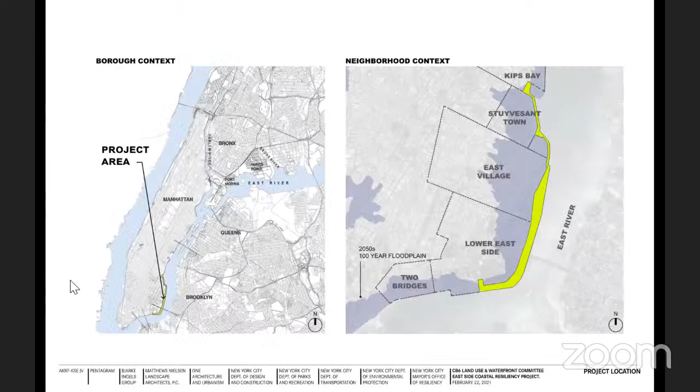I'll just give a really quick intro, and I'll let my colleagues from AKRF and Pentagram team walk us through very quickly on our design update here. So last month, where we left off, we presented wayfinding, sort of resiliency, interpretive resiliency design for the signage in the park, including this project. We had some couple of good comments and feedback from this group, from the community members and Community Board 6 folks here. That was very helpful.

We had the same presentation and feedback from Community Board 3, so we combined all the feedback and tried to incorporate as much as we could. We went back to our partner agencies, Parks and DOT. A number of those requests or questions we weren't able to incorporate, but a shortlist that we were able to address is included in this design.

What we were able to incorporate was feedback about the size and legibility of the sign, so we enlarged the actual sign and the font. We also worked on the background color so it's a little more legible, and worked on the language that was a little too technical and less educational, which was not our intent, so we added more accessible language.

With that, Johari, Rory, I'll hand it off to you folks to walk us through, and then we can take questions after that. Great, so Rory, I'll hand it off to you so you can walk through what we've updated.

So this first sign, the resiliency introduction sign — the major change from the last community board presentation we gave is first the background color of the sign. It's gone from white text on a dark background to dark text on a lighter background, and we've also added a secondary tone.

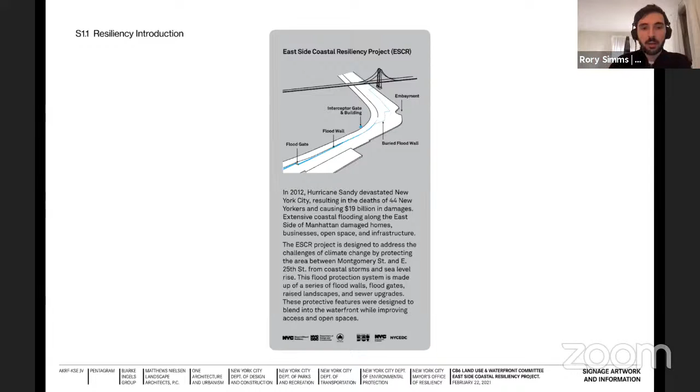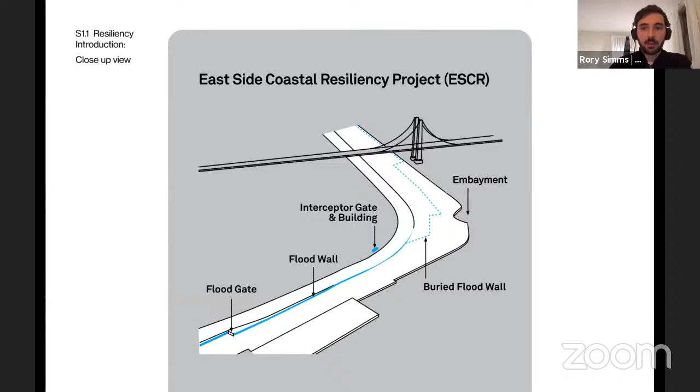So gray for the background and then white introduced into the graphics to help them pop out a bit more. We've also increased the size of the labels on the diagrams, the font size for legibility, as well as the font size of the body text and the title. The line weight of the diagrams has also been increased.

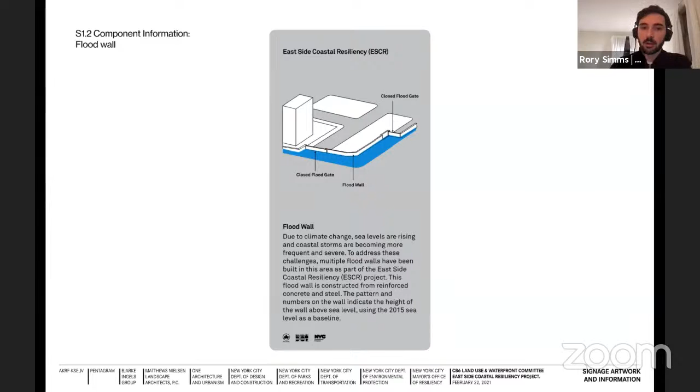For the component signs, we increased the height from 18 inches to 24 inches, so that they're consistent with the introductory sign. This also leaves more space for the increased font size and some more breathing room for the diagrams, so the sign isn't completely covered with diagram and text, making it a little more approachable.

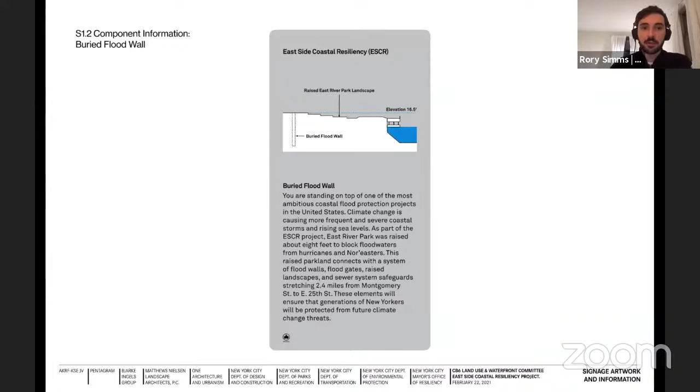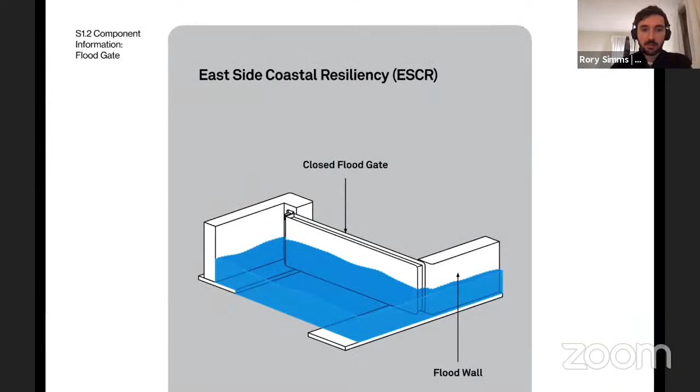Those same adjustments apply to the next three signs, all of the component information signs. And the higher contrast of the diagrams and their colors is supposed to help increase their impact and make them as legible as possible.

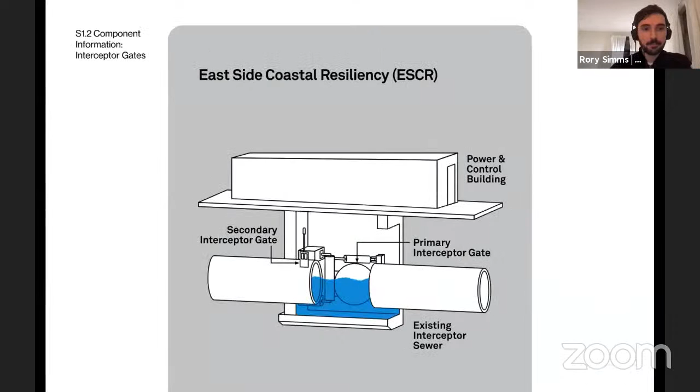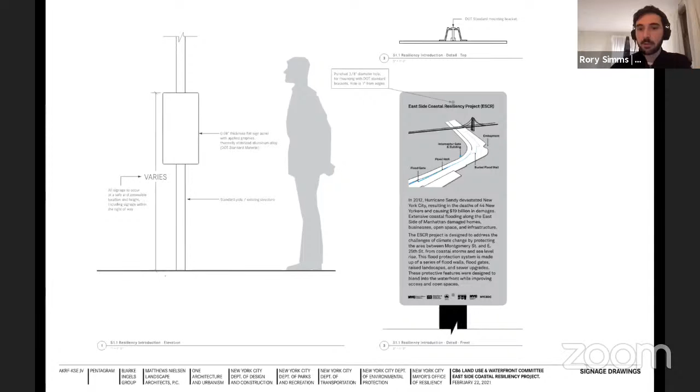The construction of the sign is more or less the same as it was, just the overall dimensions have increased.

One thing we are looking for today is a resolution so that we can proceed with PDC submission. But other than that, if there are any questions or slides you'd like us to circle back to, we can walk through them during the question period.

Okay, Anne, I see your hand up.

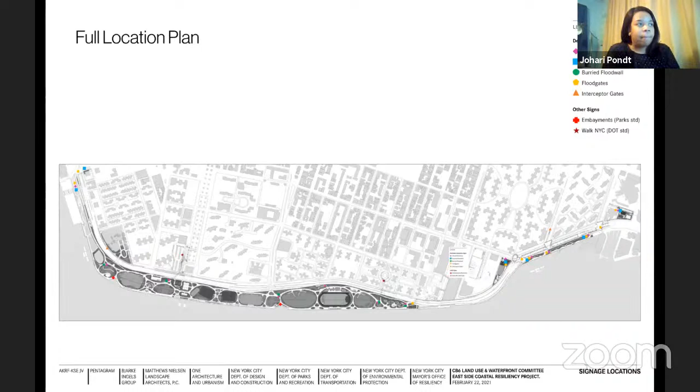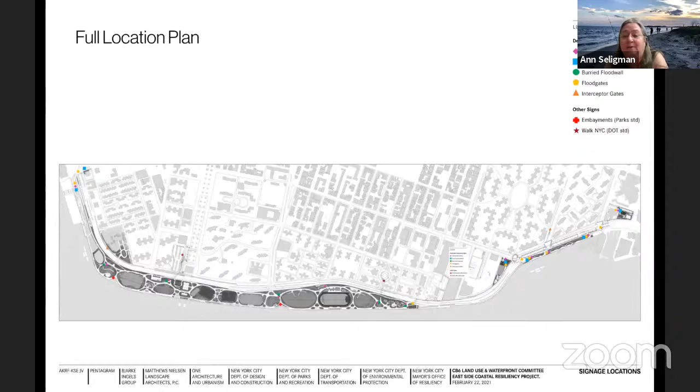Just really quickly, looking at the difference between what we asked for and what you did — one obvious mismatch is anything about either a QR code or availability in other languages, which could of course probably be achieved through a QR code. I understand there are space issues in terms of providing languages, which is why it would be great if you could have a QR code or something that says for additional information, go to the website. It does not take up more room than all those agency icons. So I'd just like to throw that out there.

Thank you. Yeah, I can speak to that. Hi Ann, this is Q from DDC. That was definitely one of our goals. However, when we really sat down and talked through it — and one thing for everybody to remember — we have to make sure that this is something that can live on beyond the life of this project timeframe. A lot of these things have to be coordinated with multiple different units at various agencies.

It's important to make sure we're delivering something we can hand off to the agencies, to their maintenance and operations units, that it's within their capabilities. So the QR code was one of the ideas we had based on the request to provide translated signs. The sign itself doesn't have enough space for multiple languages, and adding additional signs on that pole isn't possible either, because of visual clutter and vandalism or potential issues in the right of way. But the QR code came up as a creative way around that, to connect to the project website that provides that translation option.

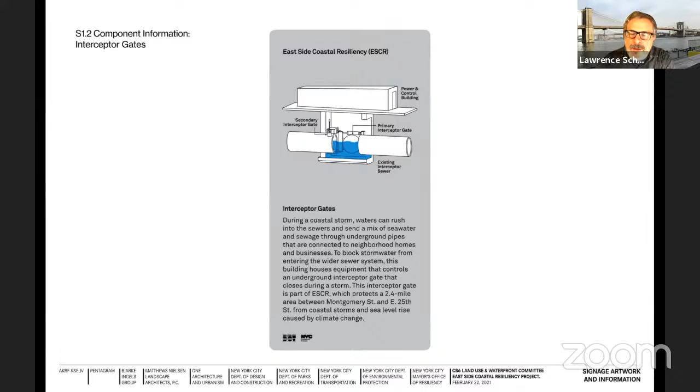Well, as long as you incorporate both, I'm on board—and also make the recommendation about having a cornerstone or the date of construction. Yeah, and the date thing—I just saw that in the comment box too.

These signs will not go up until construction is finished, until the project is done. So these are not construction signs—these are added interpretive signage for the flood protection itself. Once the project is done, the agencies overseeing that particular area, most likely Parks or DOT, their units would install these signs after we're done with the project. So we're just tasked with designing them right now and handing off the specifications.

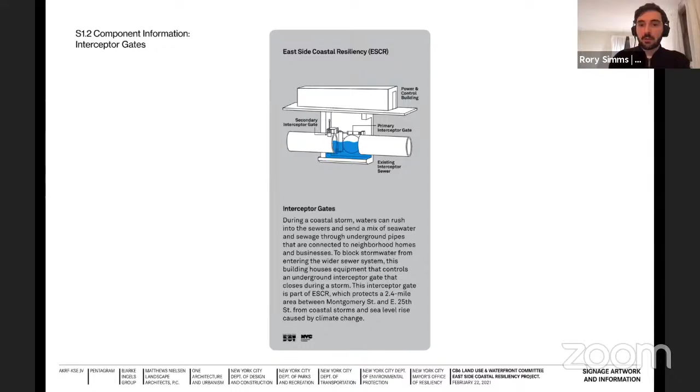Thank you. All right, thank you all. So the ESCR team is looking for a resolution before their presentation before the Public Design Commission. Does anyone want to make a motion?

All right, Sandy. I make a motion that we support this proposal for signage. Excellent. Is there a second? Second. All right, Letty, thank you very much. Cody, do you want to take a vote? Yes, I will, committee members. I will call your name and please declare in favor.

I'm sorry, can we just confirm that the resolution will include the concerns that had been raised during this meeting?

Yep, Sandy, please. I think the resolution needs to include our concern that we have access for additional languages through whatever means possible, and that we should just add that into our resolution as it's written. That we look for some other method for including alternate ways to access other languages.

Yeah, and that might include Braille and other accessibility issues. I don't know, but I just think we need to address it, that we want it to be more accessible. So if we add that into our resolution, we would still move forward with the resolution, but add that as one of our resolves.

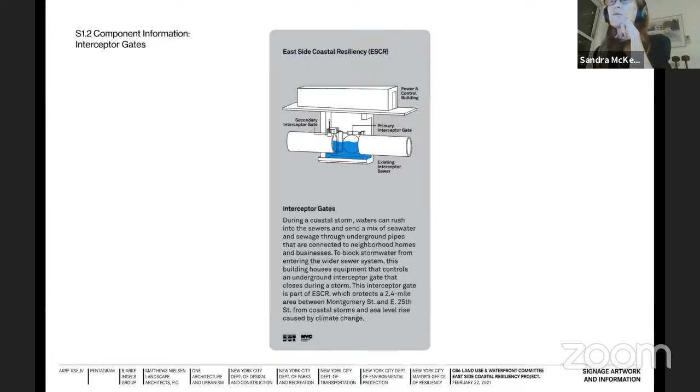Okay, I don't see a problem with that. All right, do we need to second or re-vote, or do we just go straight to the vote? There was a second on the floor, so if you want to just proceed, that's fine. Okay, I'm fine to proceed.

All right. Jim Collins. Is Jim joined? Adam Hartke. Aye. Molly Hollister. I don't think Molly's joined. Kavitha Matthew. Yes, aye.

Sandy McKee, in support. Wells Magali, in support. Gene Santoro, aye. Larry Shire, aye. Ann Seligman, aye. Lou Sapersky. Sandro Sherrod, yay. Letty Simon, aye. Kathy Thompson, aye. All right, that's 10 in favor, no opposed, no abstentions, and none not entitled.

Excellent, thank you. Well, if Lou was here, he would have said 'yo,' so that would have completed the whole circle. So anyway, do we have any volunteers to write the resolution?

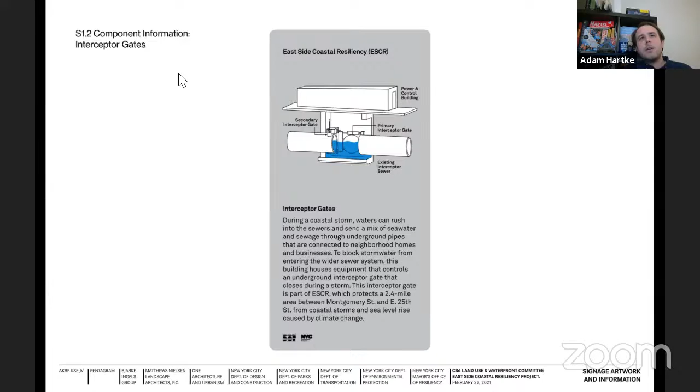All right, Desiree, I believe the floor is yours. Thank you, everyone. Thanks for having us, Adam. Thank you, Q. Thank you. Thank you. All right.

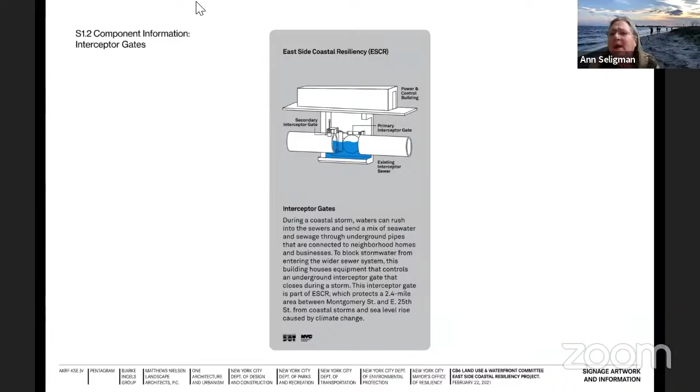Adam, I'll write it. I won't promise to get it done by next Monday, but I'll write it. Oh, okay, sounds good. Thanks, Ann.

Thanks, Adam. I'm going to share my screen now. Great, thank you. All right, great. You can see that? Yes. Great, all right, perfect.

Good evening, everyone. Thank you again for joining the ESCR portion of the CB6 Land Use Committee. Again, my name is Desiree Gazzo, HNTB LiRo, the PMCM consultant for DDC for the East Side Coastal Resiliency Project. So a few slides we have for you tonight. It's a shorter presentation, but we did want to provide an update on the upcoming construction work and a couple of other small updates. So really quickly, we'll go through the pre-construction and construction phase updates, move on to a few construction advisories which we've released recently, and then jump into a couple of points on the what we've heard slide.

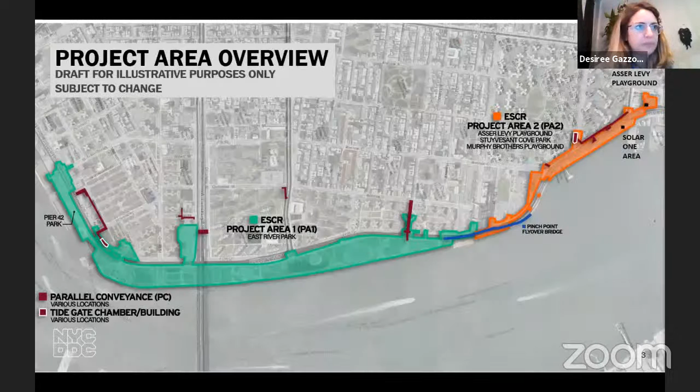So again, we have our project areas, which we show every month, and then the overview of contracts. For project area 1, as many of you already know, we had our bid opening on the 8th of February, so now those bids are under review. I know we received one or two questions in the inquiry tool regarding the bids.

There's not much to say, except right now they're under review, and we'll be able to provide more information as that review continues and once we get a clearer idea of who the lowest bidder is. So there will be a marginal impact to the overall timeline, which Jeff Markleese from DDC has spoken about last time we were here, and East River Park will remain open through spring 2021.

For project area 2, as you can see, we are in construction on what we call phase 1 of the project, which is the Asser Levy Playground and Stuy Cove Park around the Solar One area. We'll have clearer maps in the next update. Parallel conveyance will be released for bid in the upcoming weeks with the bid opening in early 2021. So those are the updates on those contracts.

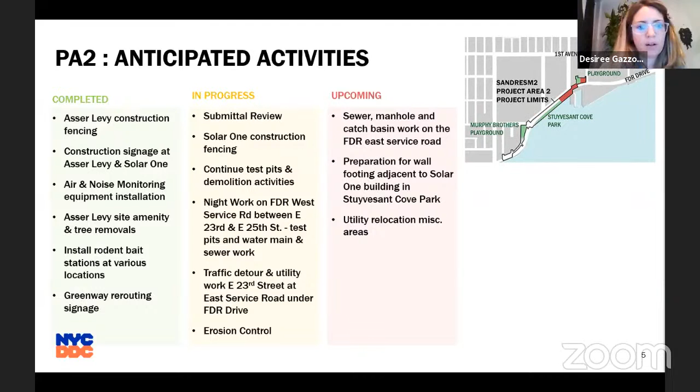And then we have some upcoming work for the FDR East Service Road, which is the detour that was associated with that. In the Solar 1 area, all behind the fence will be the preparation for the wall footing adjacent to the Solar 1 building. And throughout the area, as you can see, it's not just located in the Solar 1 area and the Asser Levy area - there are utility relocations occurring in the path of where the wall will be constructed.

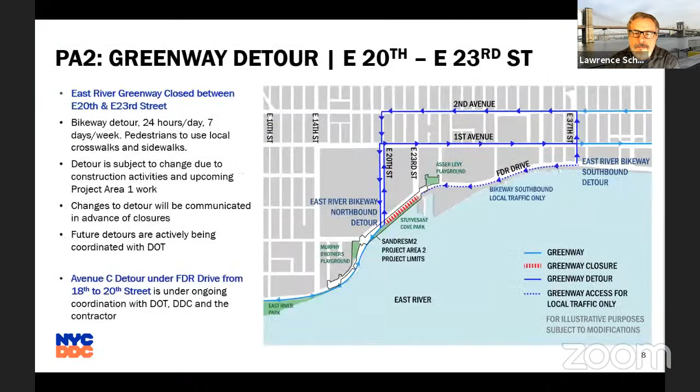This one? Yes, I appreciate this.

This is really quite informative, but I want to confirm that the northbound roadway on Avenue C will be rerouted considerably as you've depicted it. I'm just getting my bearings. Ahmed, I know you're on, so if you want to speak to this a bit more - I think you're just confirming that this is how it is now, Harry?

This is Ahmed. It is actually how it is now. The northbound traffic on Avenue C, going north, the right lane goes straight and the left lane turns left on East 23rd Street. So, answer to your question, yes, this is how it is depicted.

Okay, since I haven't driven this recently, I was trying to understand whether the right-hand curve just before the gas station has been eliminated, and one proceeds straight right into the intersection of 23rd Street.

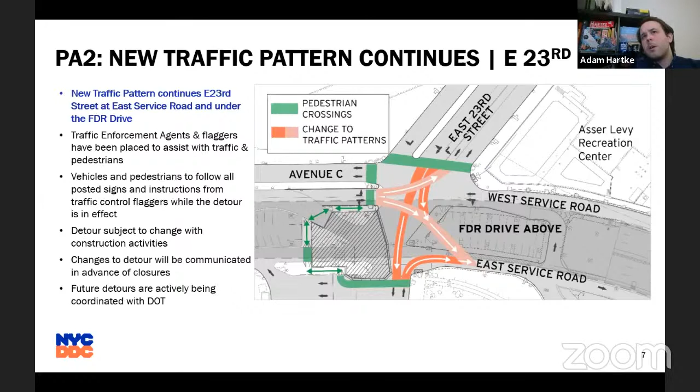Okay, we're going to address the current questions in the chat and then move on with the agenda. We'll start first with Alice. So she's asking about pedestrians. Where can people walk? The answer is you have to cross Avenue C, take the detour on the Peter Cooper side, and then walk back down at 20. Correct?

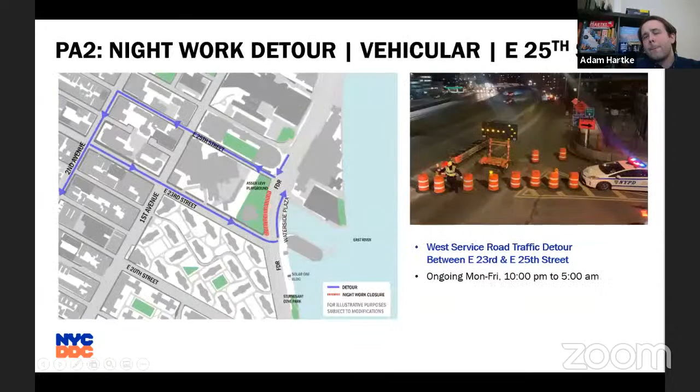Yes, I'm just pulling up that slide. There you go. Okay, great. So this is where you have to cross, and whether it's the northbound side or the southbound side, right now you're actually crossing here on the southbound side, but this will vary depending on where the construction is exactly in the intersection. But you follow the flaggers, cross, and then head down Avenue C again.

Excellent, thank you. The next question is about the power lines at Stuyvesant Cove Park. Do you know where the power lines are in the path of the flood wall being relocated in Stuyvesant Cove Park? I'm going to punt that one to Ahmed. Smart. I can answer, yes.

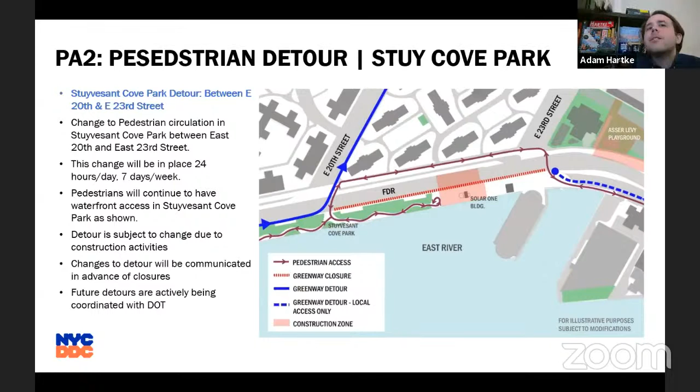Okay, so we are now going to move the agenda along to the portion that really fits into the long range planning and land use portion of this committee. As a lot of you guys may have seen over the last few months, there's been a proposal from the Speaker's office about the Planning Together Committee, a new comprehensive planning framework for New York City.

What I'm hoping we do for this portion of the meeting is just have a committee discussion. Cody and I forwarded a lot of materials that we've gathered, that other committee members have gathered. Thank you very much, Kavitha. And other community groups have actually forwarded to the office.

What's really interesting about this whole process is that I think it brought all sides together, all the different perspectives of land use, in that everyone doesn't really care for ULURP and something needs to be done. But what is it, and when does that take hold and when does that take shape?

The idea of a comprehensive plan in New York City is not a new concept whatsoever. I remember in grad school at the University of Cincinnati looking through the big borough books, part of the earlier efforts of a comprehensive plan. In fact, Cincinnati was the first city council to adopt a citywide comprehensive plan. So maybe New York City Council will follow in Cincinnati's footsteps, 80 years later. It remains to be seen.